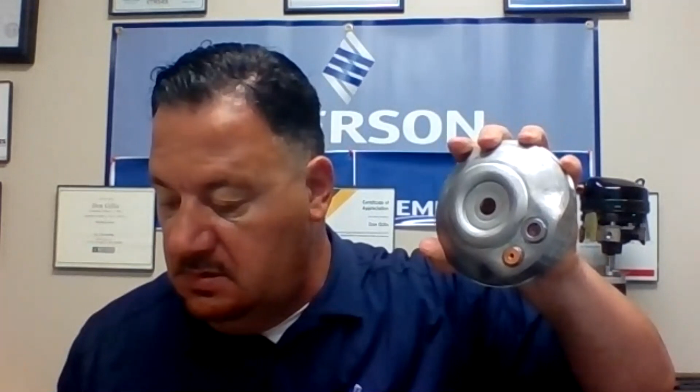Sorry about that. AE apps bulletins. If you put TOD in there, you're going to see different temperatures, but one thing for sure is you're always going to see everything going off temperature-wise somewhere between 260 to 290, always right below that 300 mark where we start to lose our lubricity with our oil.

That's something I've learned quite fast here at Emerson from reading so many AE bulletins when I first got here. The other thing we're going to see here is an IPR.

Now, once we get into higher tonnages, we're not going to see these devices in there. You're going to see devices from the OEM on the discharge lines for pressures and so on. You may have to put some kind of high pressure control leaving the compressor there, and we'll get into that another day. But specifically today, I want to talk about the IPR.

The IPR is based on pressure. The TOD is based on temperature. Again, that TOD is a bimetal that's going to react on temperature, separate between the two metals, and go off.

They are both going to shoot gas down on the inherent protector that's in the windings, which goes off on high amp or high temperatures. Again, the TOD is somewhere between 260, 290, depending on the application. I'm talking about refrigerants and so on.

The IPR, on the other hand, on all refrigerants with the exception of 410A, is going to be somewhere between 375 and 450. That's a pressure - the IPR is a differential between the high side and the low side. This muffler plate separates the discharge gas from the suction gas.

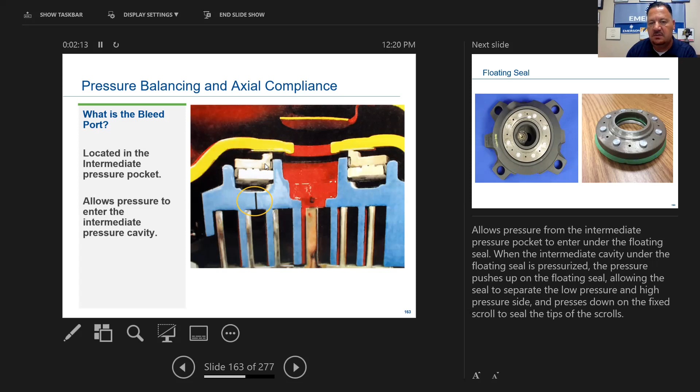Now, the reason we consider a floating seal a safety device - if for some reason that compression ratio, which we've talked a lot about, gets higher than it's supposed to be, on the low side to the high side - that high compression ratio from discharge gas to suction gas - this pressure will get weaker and weaker inside this intermediate cavity of the scroll set, and it won't have enough pressure to hold up that floating seal, and it'll drop. So the floating seal is also a safety device. Keep that in mind.

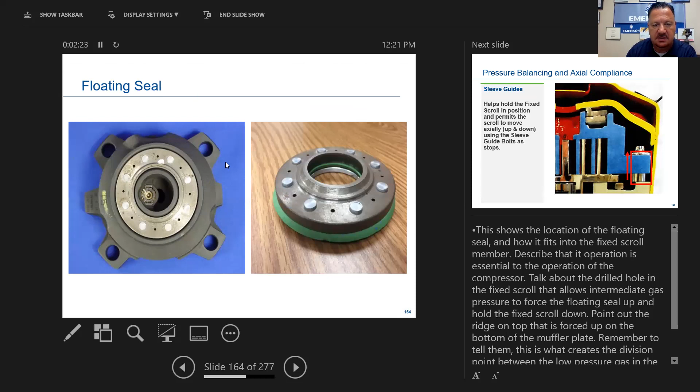There's a TOD right there - that's the bottom of the floating seal looking at it. Here's our IPR right there, you can see the IPR. High pressure side - above that is again the muffler plate. Everything there is high pressure gas. Below that is low suction gas.

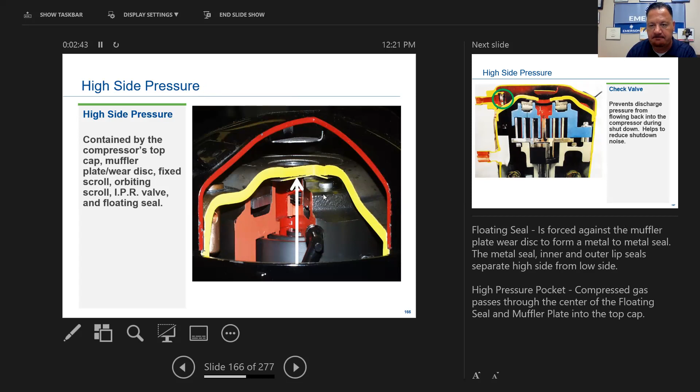Here is our check valve in the discharge port on this. It prevents discharge pressure from flowing back into the compressor during shutdown, helps reduce shutdown noise, and improves volumetric efficiency. I could go on and on and on.

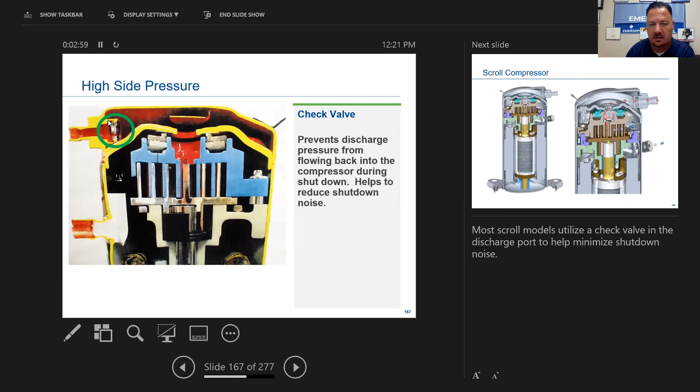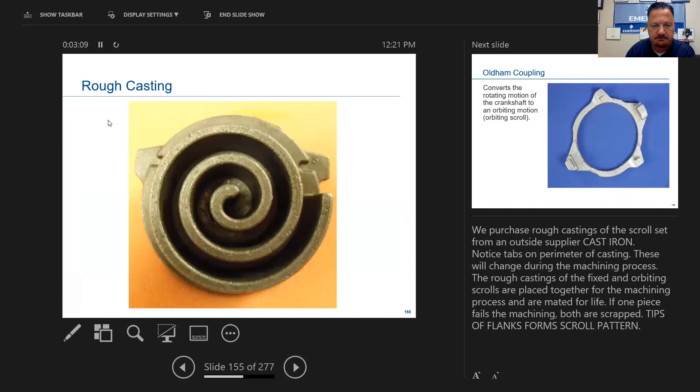That's all I wanted to talk about there. I also wanted to bring up one more thing here.

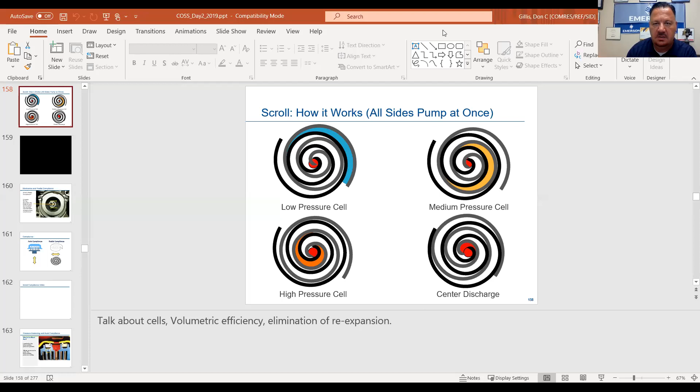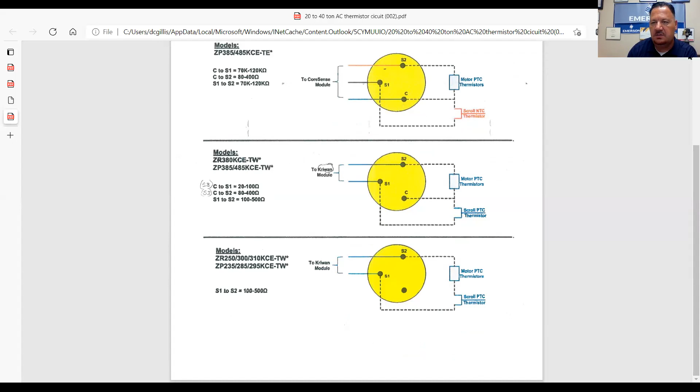Here we have the Core Sense, another Core Sense, and then we have the Kriwan product, and down here again another Kriwan module. You're also going to have one thermistor in the discharge port itself. So I want to make you aware of those.

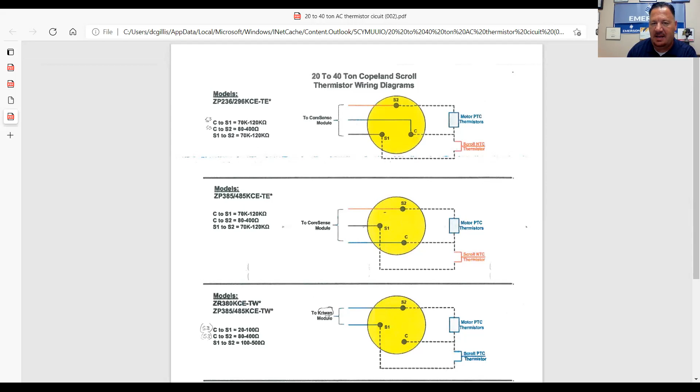You can test these thermistors, ohm out through the control protection module, whether that be Core Sense or the Kriwan. Again, you can find a lot of this stuff on your AE bulletins, your app. Don't forget the app - bringing it up to you one more time. If you're not familiar, you can email me. That's our AE bulletin app.